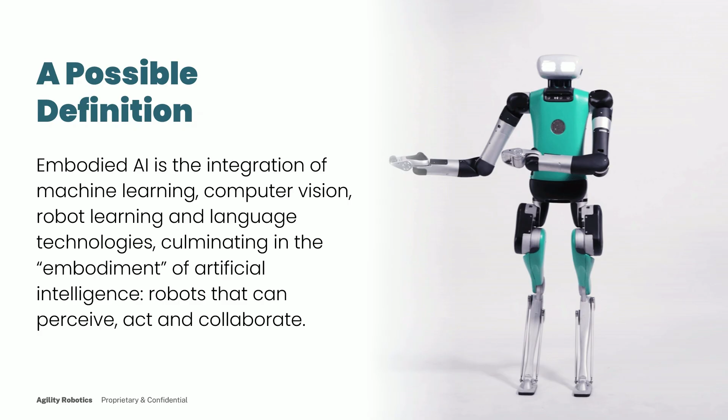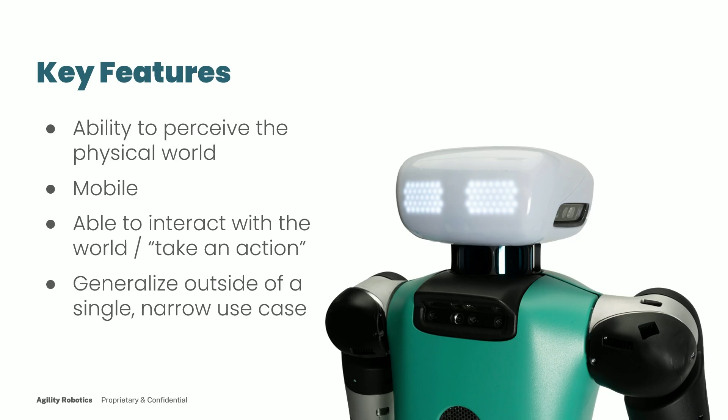We like the mobility piece of this specifically, partially because of our background, but partially because, and I here can dust off a 25-year-old philosophy degree, the idea that consciousness is extended is an important part of many theories of mind, and the ability to actually be out in the world and mobile adds a lot to, I think, what we would understand an embodied AI to be.

Now, all that being said, I want to do something a little bit unusual and try to convince you that AI is actually not necessary for much of mobility. And out of everybody in the room, Marc Raibert can probably appreciate this. We actually use a very similar division to what the rest of the field does. We call it semantic intelligence, which is the top level sort of world language-like description, and then physical intelligence, which is the planning layer down to the low level contact physics of the robot.

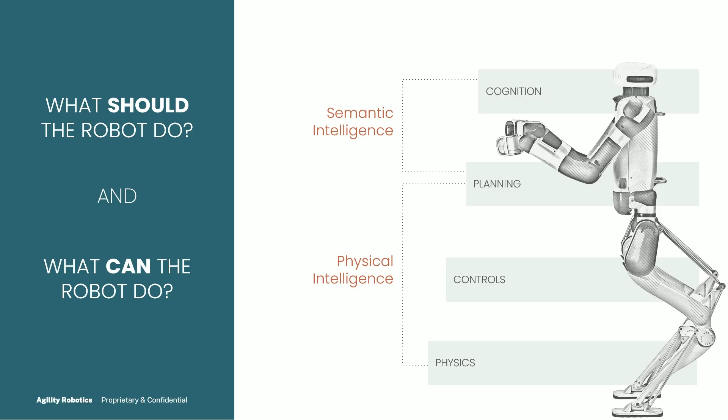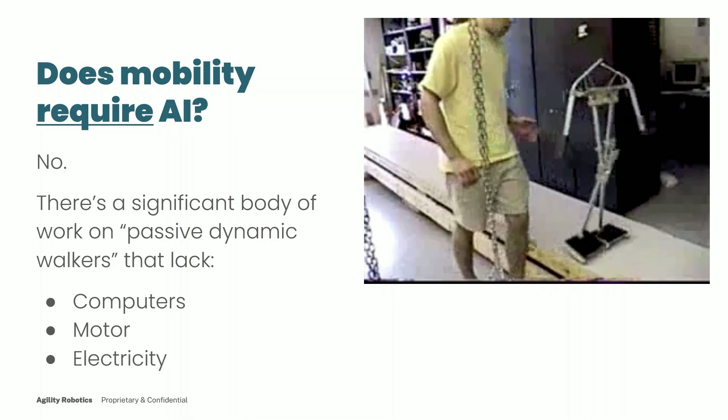And I think fascinatingly, this looks like a robot. It is not a robot. This comes out of Andy Ruina's lab up at Cornell from about 25 years ago. This is a clockwork mechanism without the clock. And so you're able to get things that look extremely natural based on first principles physics. So there's no computer, no motor, and no electricity. This is a physics first thing that happens to look like a robot.

When we look at the behavior, on the left is a guinea fowl doing about the same thing as what Digit is doing on the right. This is tissue paper. The robot has no idea that the tissue paper is there, just like the bird has no idea that it's there. And the physics here dominates the timescales that I had mentioned in the panel this morning, millisecond level timescales.

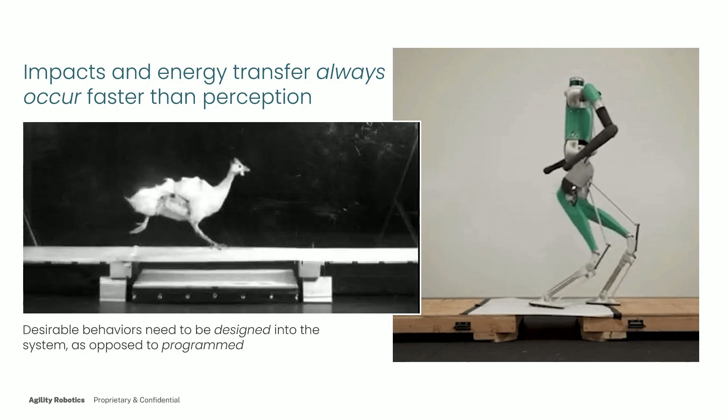With the birds, we have the advantage of knowing that neural propagation isn't fast enough to explain the fact that you can take a hard step down and recover from it. That has to be physics-based because the round-trip flight time in your neurons simply is not fast enough. Of course, Digit has wires and not neurons, so there are ways that you could try to fake this, but a lot of the built-in physics has to dominate as opposed to the AI piece of this. And so we have, at Agility, what we would call a physics-first approach.

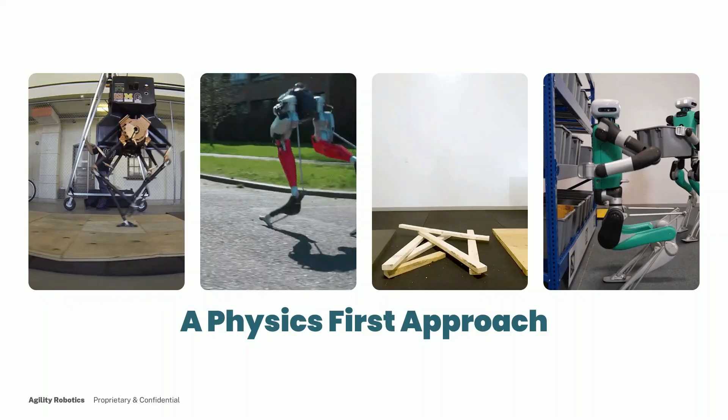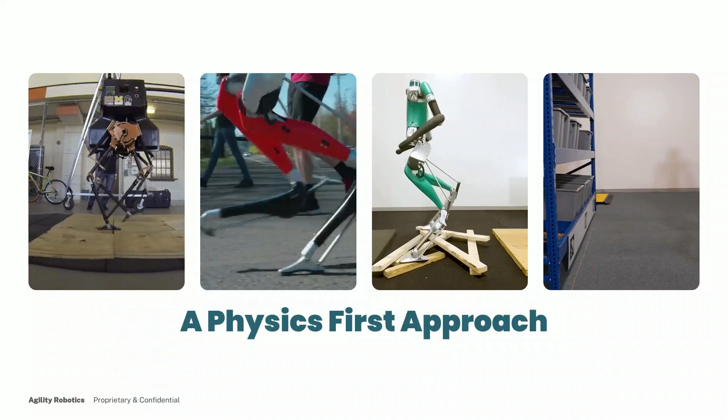All of our systems, all the way over from Atrias, which predates the start of the company, that was at the DARPA Robotics Challenge as a demonstrator back in 2015, all the way up through Cassie, our first product, earlier version of Digit, and then the modern Digit, all share at their core somewhat similar physics, obviously very different physical instantiations of the robot. And this is the full progression, so we're now up to the imaginatively named Digit version 4. There was a V0. V0 was not very good, and so we don't show it. But we're up to Digit 4 that is actively deployed at GXO, among other partners, actually doing physical work.

And so when we think about the hardware as the foundation down at, keep in mind, again, this sort of physics layer here, why is that? It's because if I just do something relatively simple, put my hand on the podium here, there are contact forces that are being exerted on my hand about 200 milliseconds before my brain is aware of it.

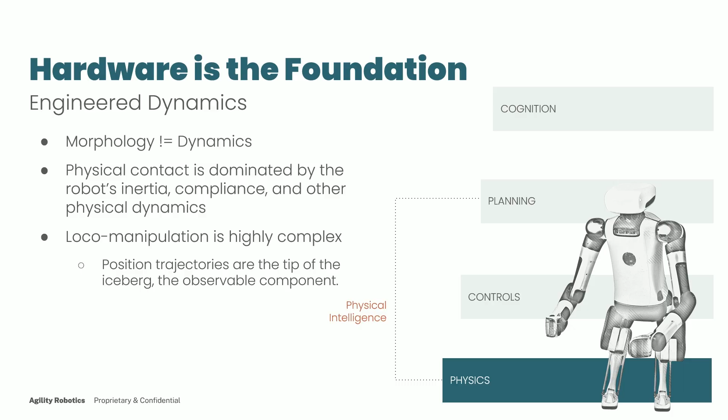And there are lots of problems with robots, but one of them is also that force perception problem. So to avoid breaking things, among them the robot, you have to have a way to move through space without relying totally on your understanding of the world. So it is extremely important that the hardware be by itself capable. You cannot AI enable a rock to fly, is our favorite example.

Now, you can do useful work with this. This is an example that we first showed at ProMat, which is a logistics trade show, about 1.5 years ago. At the time, we couldn't disclose that this was motivated by Amazon, but we shared that publicly last year. E-commerce fulfillment bins off of a racking system.

There is no AI here, or at least there is no AI as anybody who's trying to sell you AI would understand it. It's done with commodity robotics motion planners that would be sort of considered state-of-the-art 5 or 10 years ago, but aren't really modern AI.

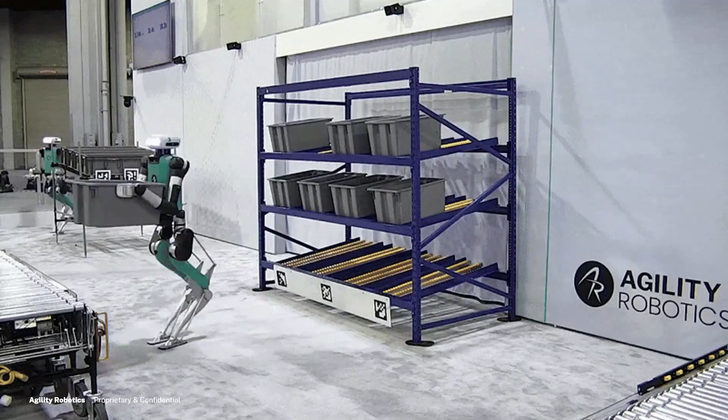And we did some live demos both at ProMat a year and a half ago and Modex. We're proud to have been, we think, the first company to ever live stream a continuous demo from a show floor. So we had this set up. This was kind of it. Our point was robots can do boring work so people don't have to do boring work. So if you get bored watching this, that's kind of the point.

Now, you can do a lot more creative stuff. Keep in mind, this is still without modern AI. I'll get to that in a second. All of these kind of complicated behaviors, bin stacking, one- and two-handed manipulation, being able to avoid complicated workspaces. This is with an automotive manufacturer that we're working with where you have to be very careful to not bump things in an aisleway with this large tote. None of this, again, requires AI.

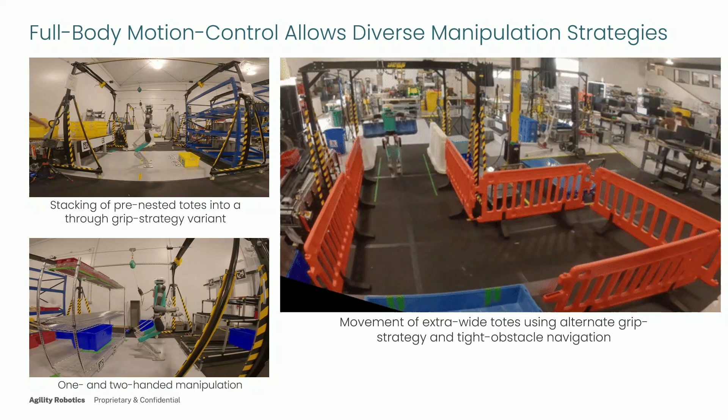So why am I making this point? It's because when you get to an AI-powered software stack, there's a whole lot more that you can now unlock on top of this, because all of those behaviors don't require AI, i.e., you don't necessarily need to teach your AI how to do all that stuff. That's, I don't want to say solved, but it is solvable in terms of how robotics is done.

So when we look at how at Agility we're thinking about this, the cognitive layer, and there probably are other ways around this, but the best way that we have found today to deal with this is with existing LLMs or VLMs. Those are trained on internet scale data, as has been noted by other people today. Access to those data sources in robotics is practically non-existent.

In some sense, you're trying to really say, what is a podium? What is a room? And so if I tell a robot to walk into the room and up onto the podium, what am I actually telling it to do? That's solvable because humans have written down lots of words over hundreds of years about the world that we live in. So we don't have to rely on robotics training. This is not a robotics training problem. This is a human semantics training problem.

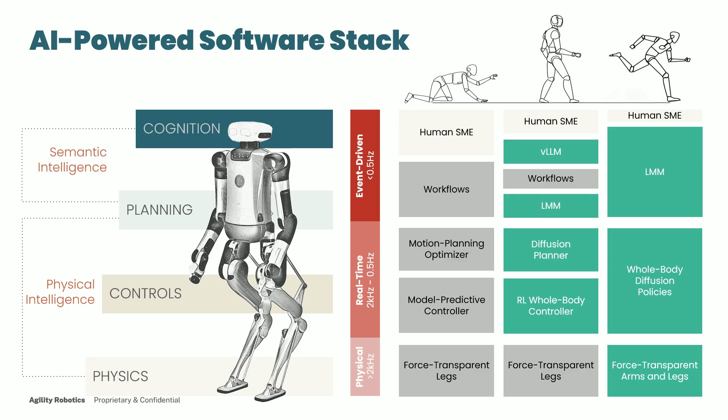By the time we're down at the bottom, though, notice that force transparent legs sort of persist across all these epochs, even as you phase more AI in. And the reason for that is you can't solve that problem any other way. The world exists. It has physicality that's not directly solvable with AI.

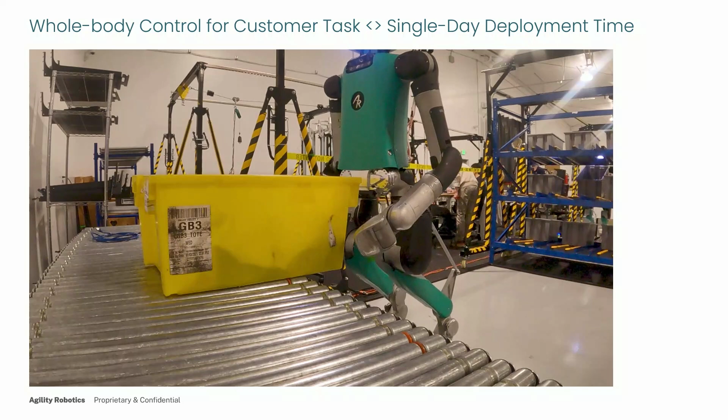So here's an example of using the AI reinforcement learning stack. Remember, hard math is what it's doing here. It's picking up a tote. First tote was empty. This tote has 10 kilograms in it. This was trained in simulation.

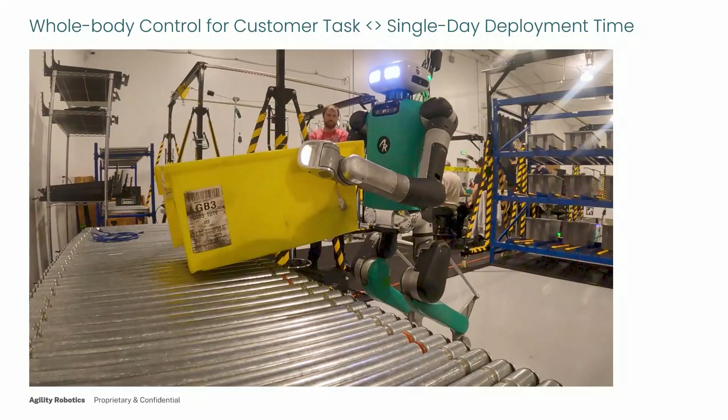And then the last one, which I like a lot, is 10 kilograms plus an additional 10 kilograms actually tossed into the bin dynamically. That was not in the training set, but the RL policy is robust enough for the robot to be able to pick it up. It drops it at the end just because we told it to put it down, because we were starting to hit the joint torque limits on the robot.

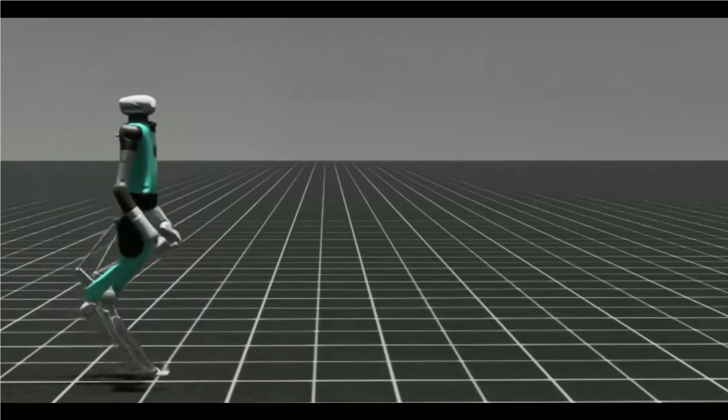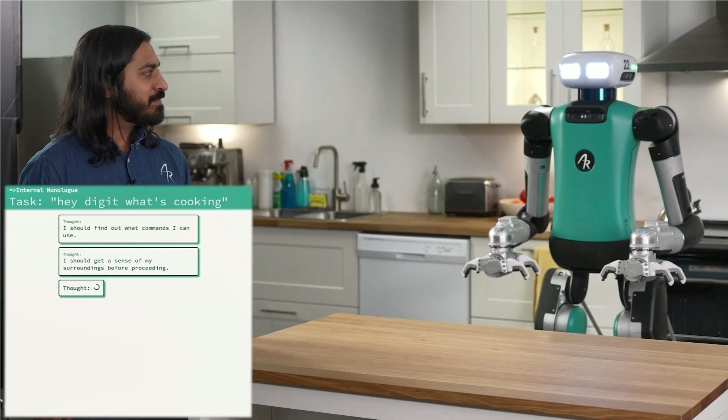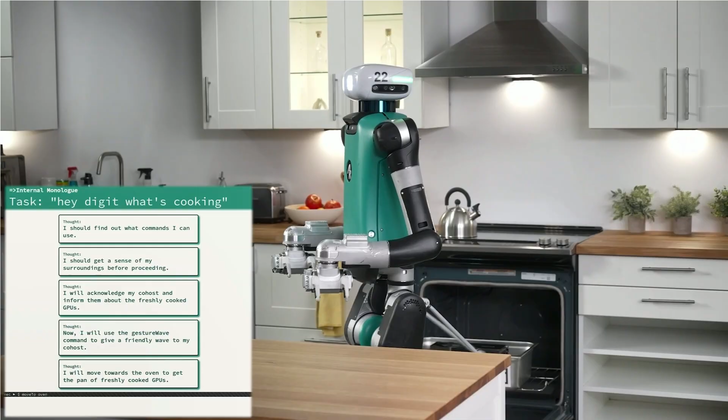So if you take those layers, and remember the RL pieces here are somewhat modular. This was also part of the work that we did with NVIDIA. This was grafting a large language model onto it, giving the robot some context descriptively, and then adding this sort of cheeky prompt where Jensen really likes to cook, I guess, as a hobby. So there were some freshly baked GPUs that had to be taken out of an oven. It looks like this behavior was scripted.

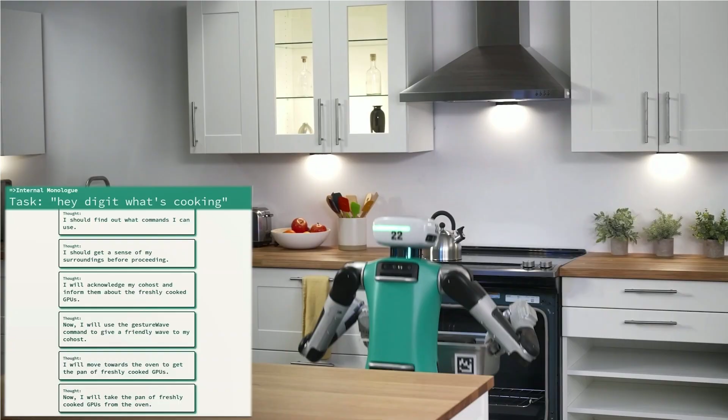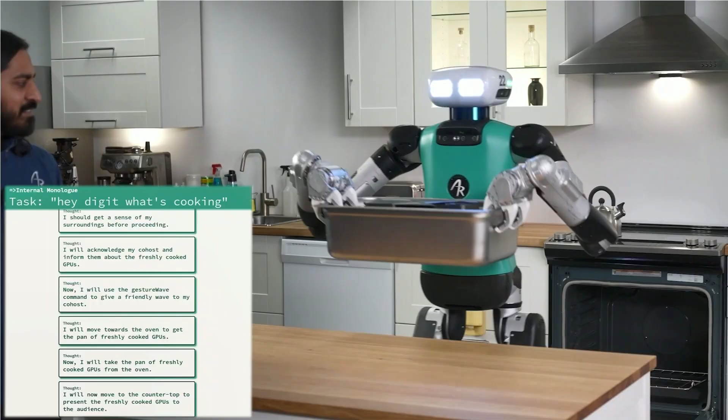It was not. What was, in some sense, scripted here is the fact that the robot does have available to it a menu of tasks that it can pull from. It knows how to walk to a place. It knows how to grab something. It knows, in this case, and I'll show you something that's a little bit different than this in a second, where the grasp points are. But the behavior was entirely novel. It, again, was not pre-scripted here. So that's very new, and it's very new within the last 2 years.

Prior to that point, in order for you to have put together an application like this would require, at best case, someone using a set of code blocks that allow you to basically compose a set of pre-scripted actions into a sequence and then deploy that, but that sounds an awful lot like you need to hire an engineer to take GPUs out of an oven, which is probably not the most efficient use of venture capital.

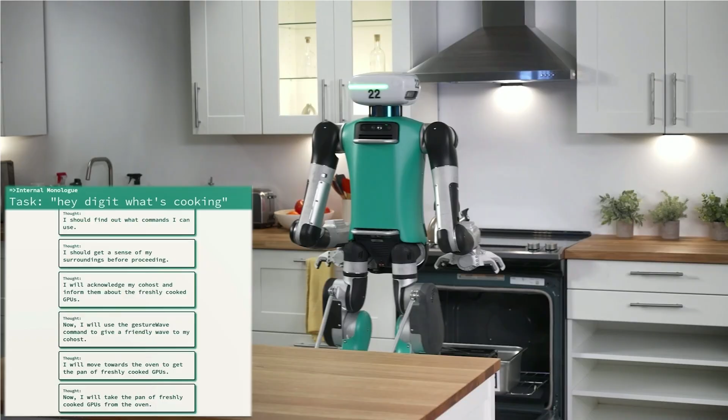So what are we doing with this? Well, the major thing that we're looking at right now is how do we combine that kind of VLM with our start of working on diffusion policies for the control of the robot. So diffusion policies, if anybody's pitching to you that they're doing training data by teleoperation, this is the only thing that I'm showing you today that was teleoperated. Everything else was full autonomy on the robot. In this case, we are training sort of candidate behaviors using a very small training set, an afternoon of engineer work, doing some teleoperation to show a behavior.

And before I click over to the next slide, I'll say that this is not necessarily different than other ways of giving the robot candidate behaviors. You can do very complicated math that no one understands. You can do very complicated math, or you can do just math. All of them yield behaviors at some level. And in this case, diffusion policy is fancy, and you can get VCs to give you money if you say diffusion policy. That might be harder than if you say math, but it really is, at the end of the day, a set of behaviors that the robot knows how to do.

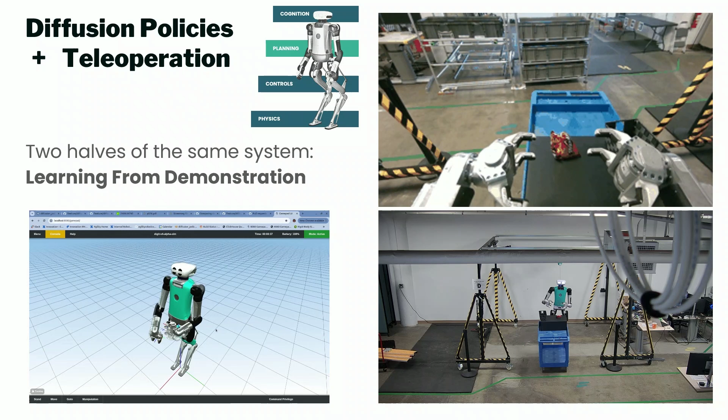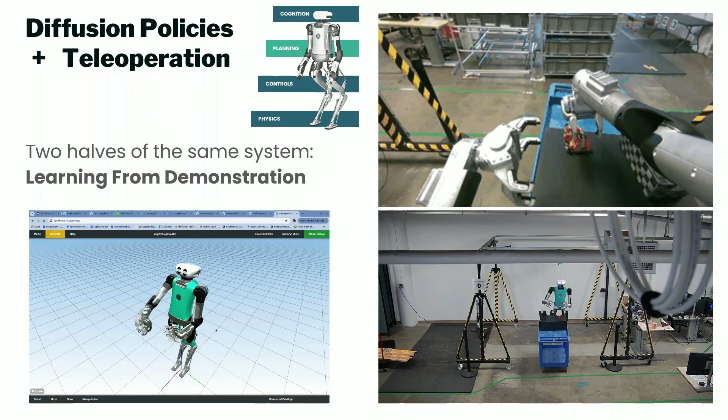If I had to say something that I think is really, really different moving forwards, this sort of thing is the future of robotics. Now, keep in mind, we got here via a route, and I think why this works so well is that we don't need AI to keep the robot up, we don't need the AI to keep the robot safe, and we don't need the AI to make the robot economically interesting to customers. This is now an unlock on the diversity of tasks, which I think is the future of robotics.